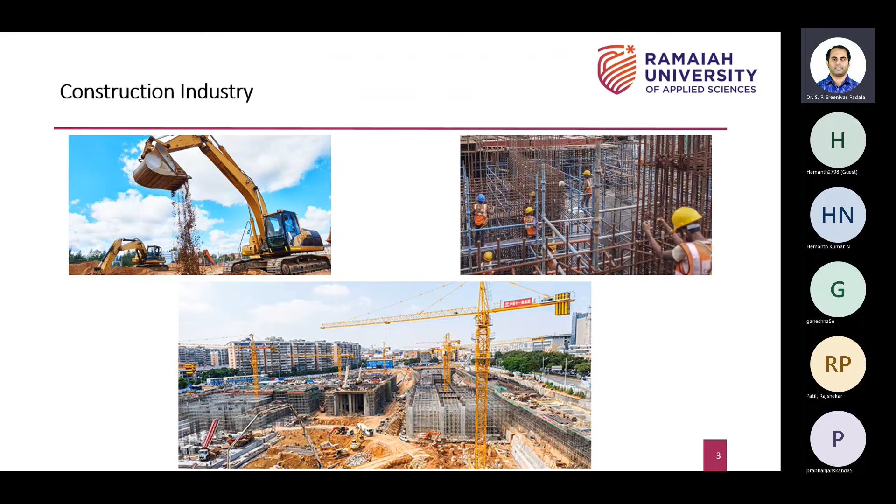Due to COVID, progress was a little decreased. Every company or every industry got affected with COVID. Otherwise, in 2019 only, our Indian government predicted that the size of the construction industry is expected to be USD 1 trillion by 2030. Also, construction is poised to become the largest employer by 2024. To reach that target, we required around 4 million construction engineers on an average over the next decade. That's taken from one of the news channels, India Today, in 2019.

But due to COVID, it got shifted slightly to 2025. What I can say is there is a lot of growth, a lot of requirement in terms of jobs in the construction industry. But again, when I talk about construction industry, I'm not talking about the site jobs, I'm not talking about where you have to work on sites. I'm talking about white collar jobs.

There are also other startups, other companies, other consultants. They found out a lot of other different industry trends. They listed out the top 10 construction industry trends and innovations for the present year - the article was prepared long back, I think they published it in 2019. So they listed out various trends.

Starting with building information modeling, which is one of the future trends in construction industry, and which I'm going to discuss in this webinar. Then we have construction robotics - it's nothing but automation of the industry, using automated machines without help of any manpower. Then we have construction project management - we have MTech in construction project management, a separate course which involves application of various management principles in construction.

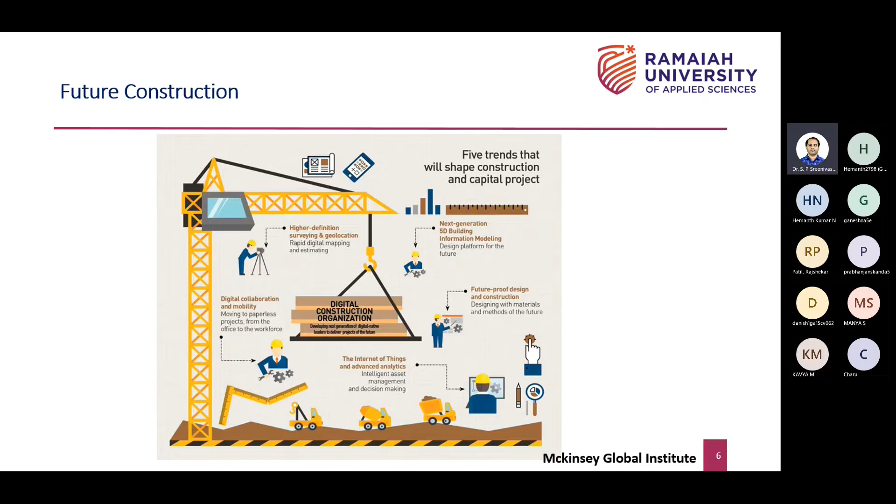It started only 2 years ago, but by another 3-4 years, by the time you graduate - especially class 12 students who want to pursue BTech in civil engineering, or even for MTech, if a BTech graduate wants to pursue MTech in construction management in the upcoming academic year - by the time you graduate, you will find this complete transformation across organizations. You will be getting opportunities in this sector like anything - there is very high demand in our industry.

So again, this is another consulting firm - World Economic Forum and Boston Consulting Group. They also created top 10 trends, similar to the previous slide, but I want to prove that a lot of companies have already started implementing this technology. So from this slide also, you can understand that I'm talking about the application of technologies.

When I say technology, we generally think about computer science, artificial intelligence, machine learning, and some other branches. But what I'm trying to say is there is a lot of requirement to apply the same technology even in the construction industry.

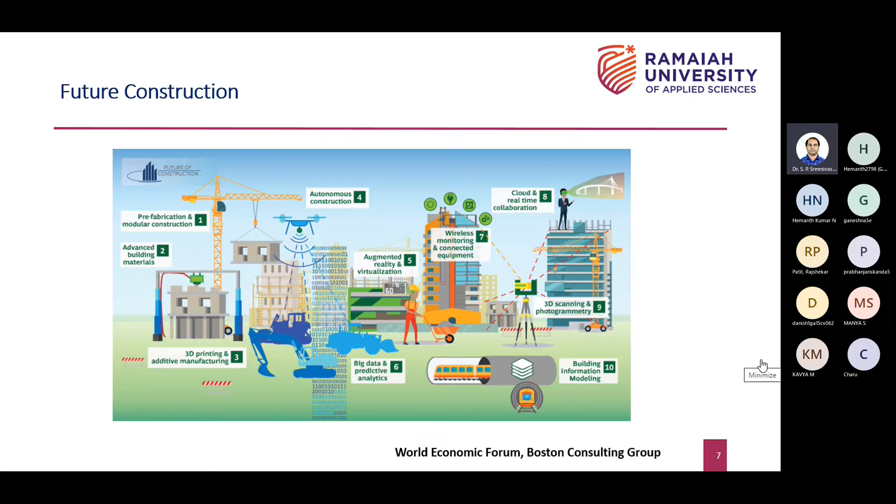As a civil engineer, if you can learn these technologies, you will be better able to apply these techniques in the construction industry, because you will understand what construction is. As civil engineers, you will know better how to apply it than if I give the same job to a CSE or artificial intelligence or data science engineer - they cannot apply it as well.

So there are a lot of new future job skills created by McKinsey. You can see on the right hand side, starting with digital collaboration, then back office work - meaning you're not on site working in the project directly, but working in the office, more like white collar jobs. Then on-site execution, where you are exactly working at the site.

There are around 37 job skills required by industries, predicted and listed by industry. So what industry is trying to say is that students should be aware of all these skills during their BTech and also at the MTech level. You cannot master every skill, but you can see here on the left hand side.

If I talk about 15, see the size of this circle - 15 is nothing but building information modeling. It clearly shows that it's one of the major job fields, or a top skill where you need to build up expertise. And there are many other things.

Number 20 is document management, which involves managing various documents using technology - like tabs or smartphones - to manage documents in a better way. Basically, it's all about paperless work. So you can see many things are there.

Interestingly, you can also see many things - for example, 16 is contract management, then you have 3D printing, then artificial intelligence and machine learning. So there are many job skills in the construction industry which are yet to take place.

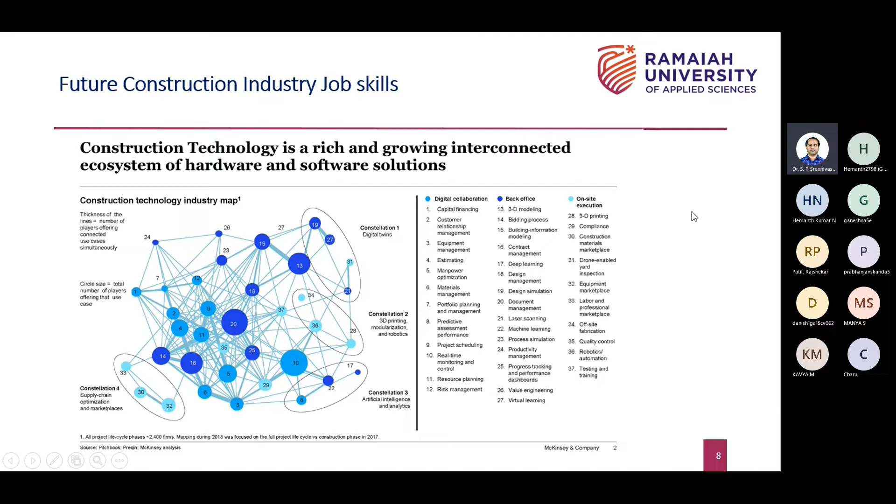In this presentation, I will discuss virtual construction. If you remember the title, it's building information modeling, in short form called BIM. Again, it's a virtual construction intelligence system. So I will be discussing the virtual construction world basically.

The question arises, who will do this job? Obviously the undergraduates, then all the postgraduates, the students have to do this job. That's what this civil engineering is all about. It's completely different now, so I will be discussing exactly what this means.

What is the meaning of this? What is a virtual construction? I will discuss all those things. Now, what is the benefit of going with this field and why is it important? That also I will discuss.

When you talk about virtual construction, it's all about doing all the practices using some technology. What you're seeing in this slide is basically a construction site. If you remember the first slide, I showed you the real picture where you have labor, a lot of workforce, equipment, and a lot of material lying on the ground. It's the same picture, but now you can see technology everywhere, for example site sensors.

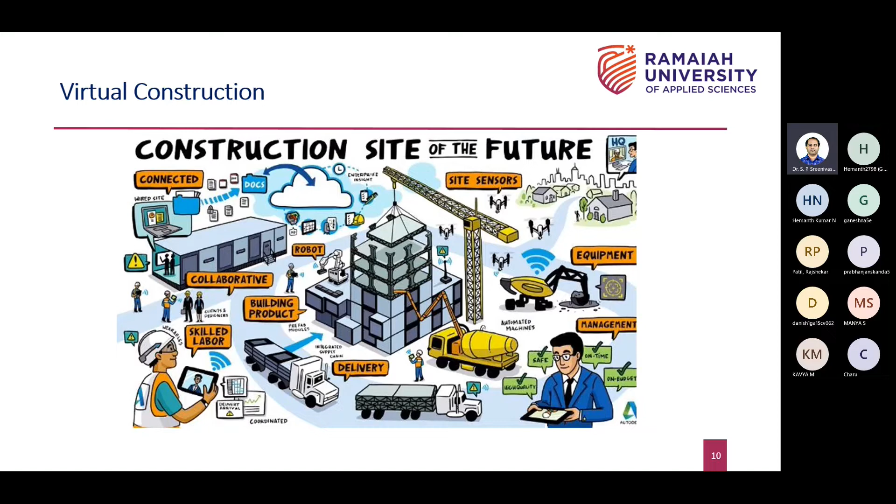So there are many other benefits out there. Now you can see in this slide presently - what you're seeing is all these buildings which are already executed, already built. The building is already completed. But suddenly I want to bring one highway here, I want to start a metro project.

I want to bring something here, some type of transport system. It can be highway, metro, underground, anything. So directly I cannot go to the site and start the work, but I want to check the feasibility. To do that, I can use a technology called virtual construction.

You can see that virtually I am able to build this. It's a virtual model, not a real model, but I'm trying to place the virtual model in this and checking whether it is feasible or not.

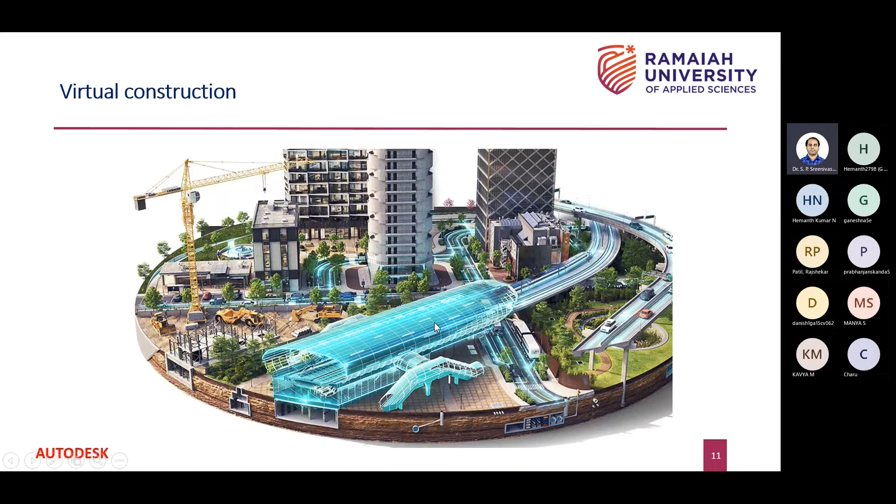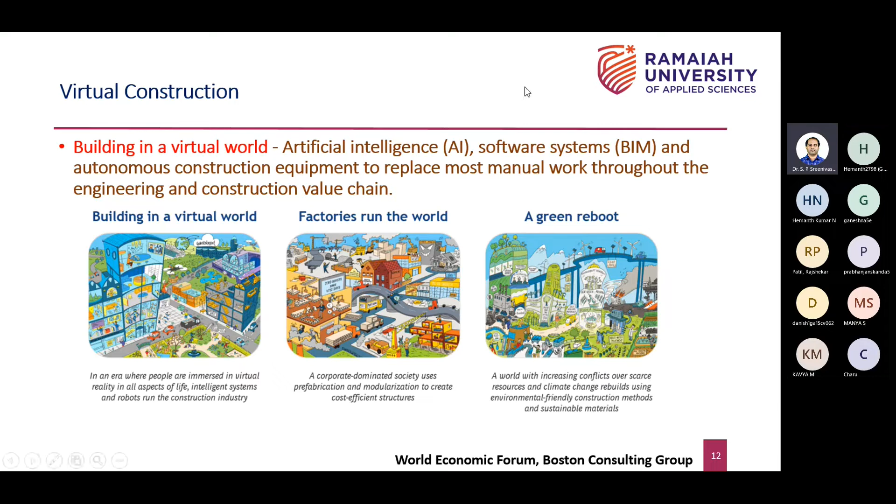When it comes to the virtual model, there are many things, not only building information modeling. It's not only about software - you can see here the application of artificial intelligence, then some software systems like BIM, and also autonomous construction equipment like automated equipment that can help replace most of the manual work. That's all about virtual construction or virtual world. But in this presentation, I'm talking about only the BIM part, not the other areas.

So all this is done before you start the project. It is not done after completing a project or during the project, but everything is done before you plan to do the real work on this site, on the field.

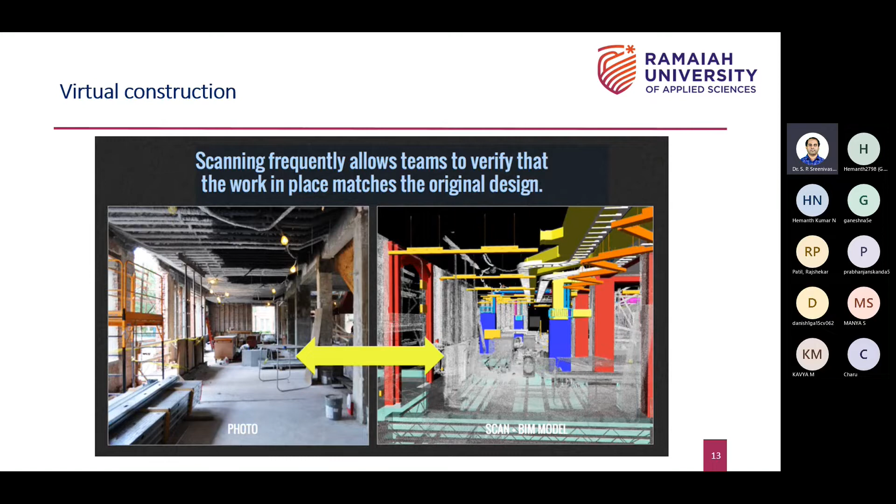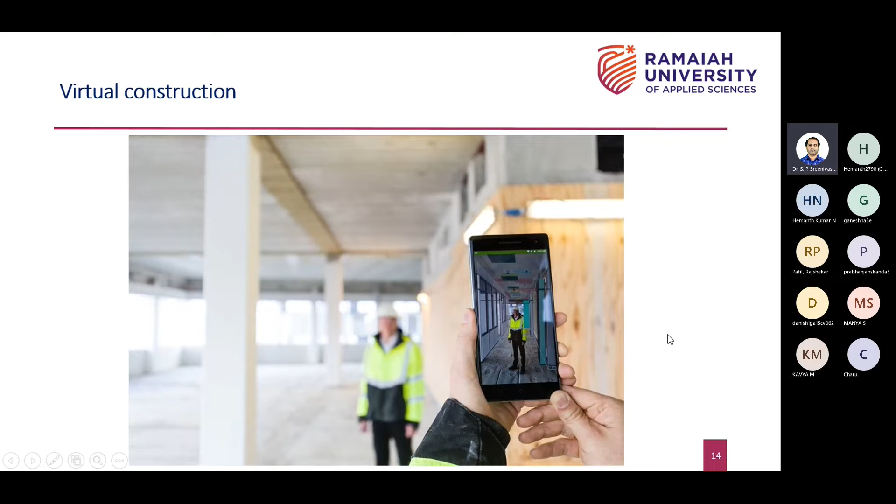Another snapshot here. You can see on the left hand side there is a person standing in the empty layout, just having a structure with the columns, beams and slabs. On the right hand side there is a smartphone, and he's taking a snapshot of the person. In this picture, basically you will see that everything is already completed - there's a virtual model built in the smartphone, and you can see the person is standing in that virtual model. So this also will help us understand how it will look in the future before you start working on that. That's the purpose of virtual construction.

This is another field. You can see the person is standing right now. He's holding a tab and there is no structure in front of him, but he already built the structure virtually, and he's just come to the field to check how it will look like. I mean, when I say how it will look like, it's not in layman language - it's technical, but I won't use too many technical words.

You can do many things. You can do some analysis - loading and structural analysis, cross checks, safety analysis. You can also do some costing, some simulations, and many other analyses like energy analysis. So we can do many things in the virtual world.

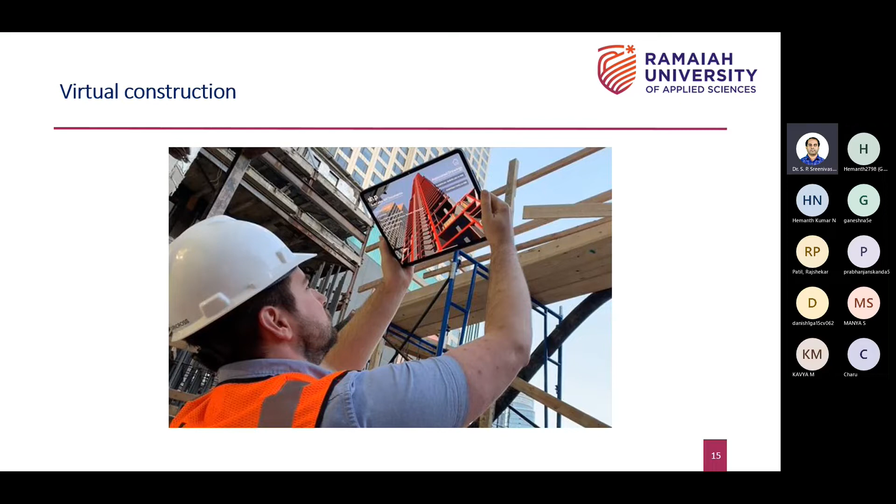But as of now, what you can see is a person holding a virtual model of what's going to happen in future, and he's just checking how it will look like. So what I'll do is play one small few-seconds video.

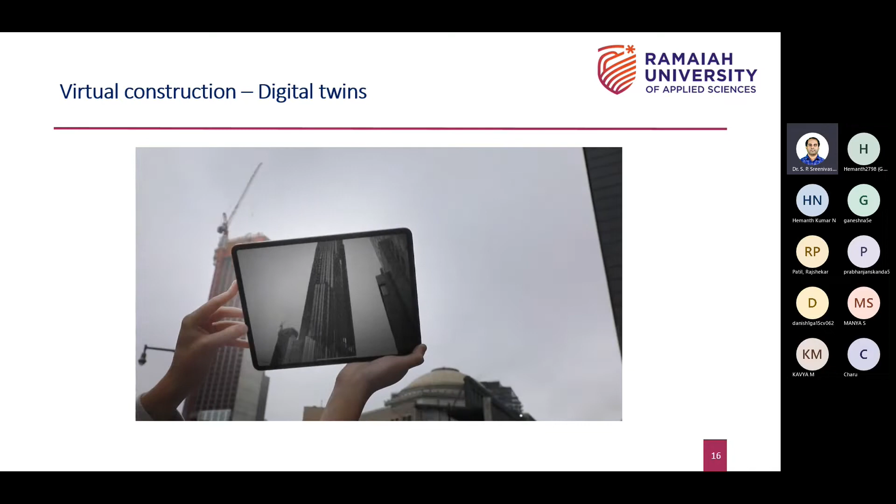You can see here also the person is standing in the city, in the busy city area. In front of the tab, the contractor wants to build a very tall building, and it's already built virtually. So before they start the project, they want to check how it will look like. So you can see this snapshot. Let's see a few seconds video. So it's very clear that tall building is not there, but it's already built virtually, and they're trying to locate there, trying to understand or check the feasibility.

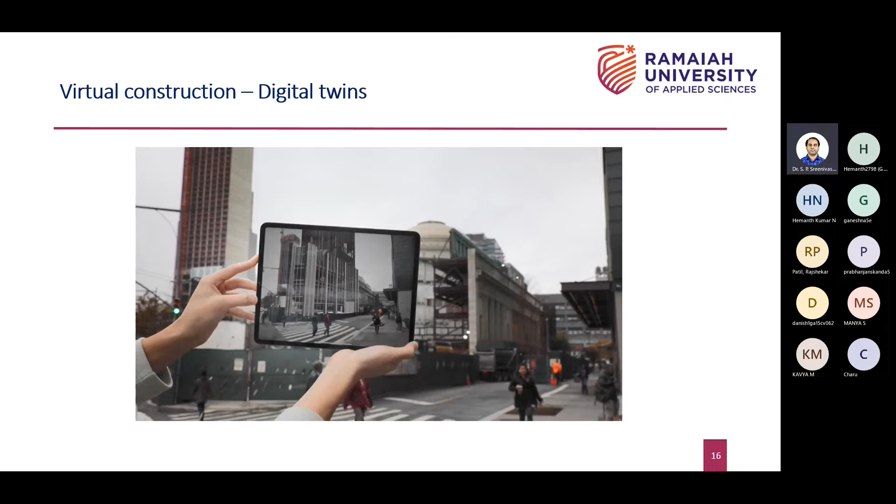And you can see that people are moving here, and it's not affecting that model. I mean, see the quality, the level of detail required for that. It's all about virtual construction.

So again, there are a lot of different names given for virtual construction. Some say digital twins, some talk about augmented reality, then virtual reality. We also know there are separate courses, online or degree courses, for augmented reality and virtual reality. Construction people say it's BIM. In UK, some countries call it zero drawing construction - meaning you're building a building without any documents, without any drawings, without any detailing, just simple with 3D models.

You can straight away start a project without any paperwork, or paperless work. Then some other group of people say it is nothing but digital construction - application of digital technologies. Then construction industry 4.0 is another term used. So there are different terms used to define virtual construction, but in this presentation, I will be using BIM as a term to explain virtual construction.

In the news, when it comes to India, not only other countries, you can see a lot of articles already published by various news agencies, starting with Hindu, then Digital Builder, then Geospatial World. There are different organizations in India. They already have published articles about this topic, and this article says that there is a lot of demand for application of these virtual technologies.

So what it says again is it's for students. Students have to develop these skills. You cannot learn everything in your BTech or MTech level, but you should be aware of all those things so that you will be ready for the future jobs.

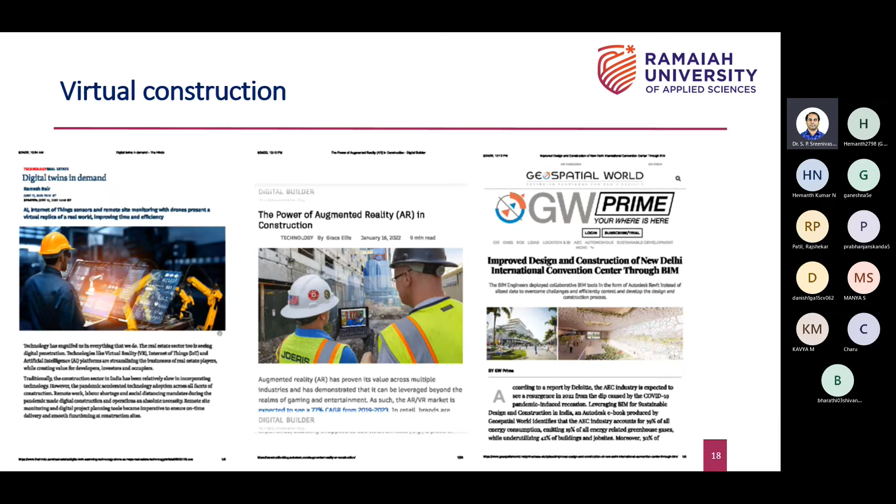So as the title says in this webinar, it's building information modeling. In short, I call it BIM. It's one of the best platforms where you can build various visual models.

So what you can see in this figure is the life cycle of a project. Generally, initially you have to start programming, meaning you need to schedule it, plan for the project, identify the various activities involved, set up and design the project, estimate the resources, calculate the cost of the project. You need to do a lot of planning.

Once that is done, you have to develop a concept drawing, a concept model, then go with a very detailed model. Then you will be doing a lot of analysis, like structural analysis, energy analysis, scheduling, costing. Then documentation is very important for various reasons, to communicate with other people and even for getting approval from various agencies. You need to document everything.

Once it is approved, you will start fabricating, then start construction, then start applying or procuring the equipment. Once you complete a project, you have to maintain the building. If you talk about apartments, there will be operation engineers and operation staff who will operate the building and take care of maintenance. Once the building becomes old, finally either you can demolish it or renovate it, which is called renovation. So that's a very standard project life cycle.

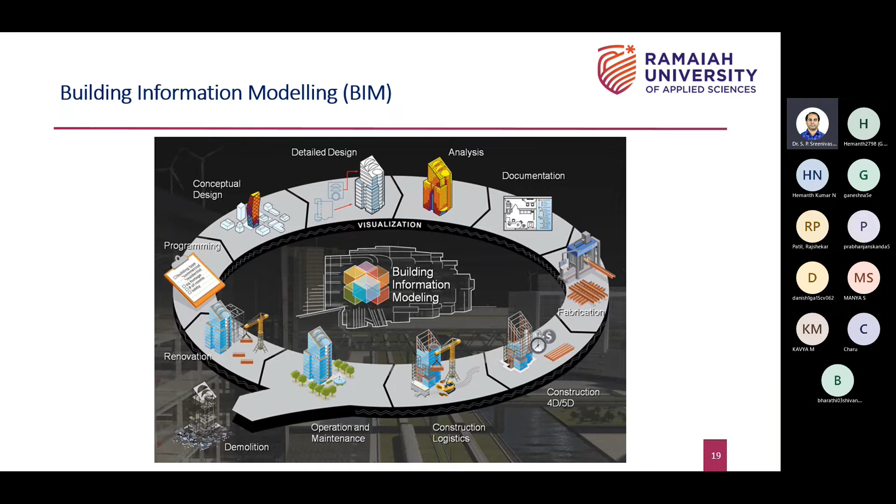What I can see nowadays is that students, especially those in class 12, or even their parents, are not aware of this technology which can be useful in the construction industry. Everyone thinks construction is more like a blue collar job, working in the field. It's not like that. We have a lot of white collar jobs where we need to apply a lot of technology to improve the performance of the projects.

So why is this industry, the Indian or in general the construction industry, interested in BIM for virtual construction? What is the main reason for going with this technology? Why BIM? Why virtual construction?

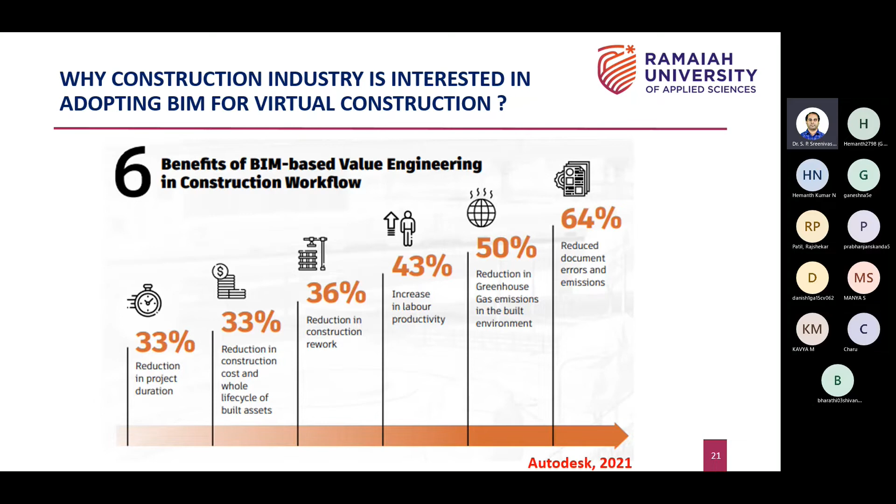A plant room has a set of equipment, pipelines and so on to provide a cool environment in the structure. It's basically a heating, ventilation and air conditioning system, among other systems that help operate the building, regulating the temperature. If you want it warm or cool, it helps provide that.

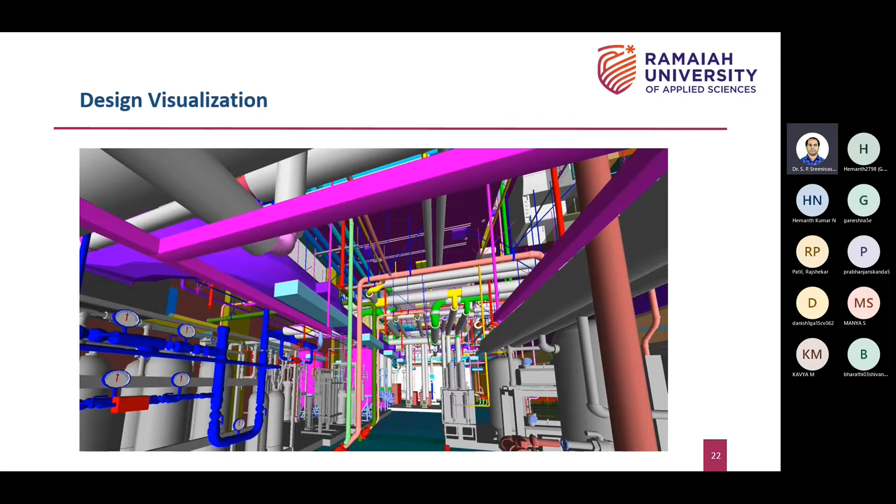But for that you need to install many things. The project hasn't started, but I've built everything virtually, so now I can walk through this model. I can check whether everything is correctly and properly installed, and whether any pipeline is hitting other pipelines. So those things can also be visualized.

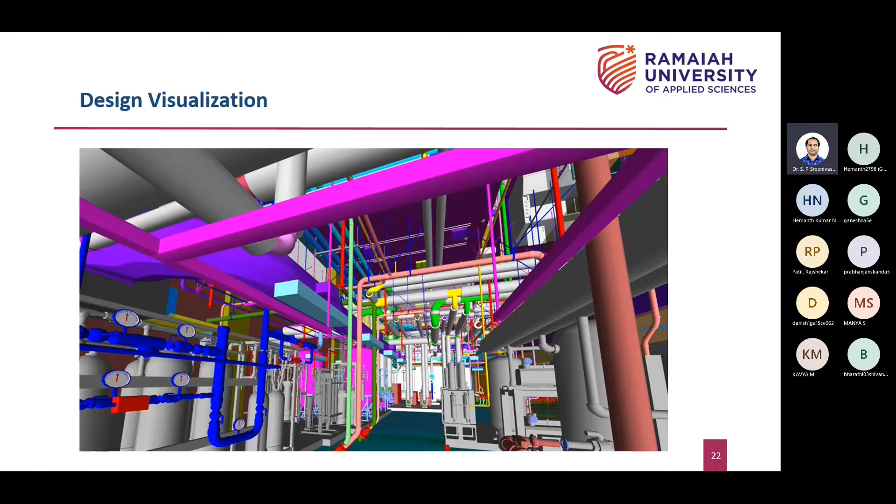If I find any issues, I can resolve them now in the digital model. Then in the real project, I won't have that type of errors. So that is an example.

For example, you can see here there's one column, a vertical structure, and a horizontal structure. The vertical part is an I-section steel channel, and horizontally there's a beam coming in. This red colored beam or structure - these two structures are getting collided virtually.

Here you can see the pipeline going inside this beam, and on the right hand side this pipeline is touching the beam too. If you don't identify these mistakes before starting the project, you will end up doing a lot of rework in the real project.

Just imagine if you find these mistakes in real projects - what happens? You have to stop the work, remove things, keep all the manpower idle, and you lose a lot of money. If you delay your project by even 1 day, you lose more money - you can lose up to 30 to 40 lakhs per day if you're delaying the project.

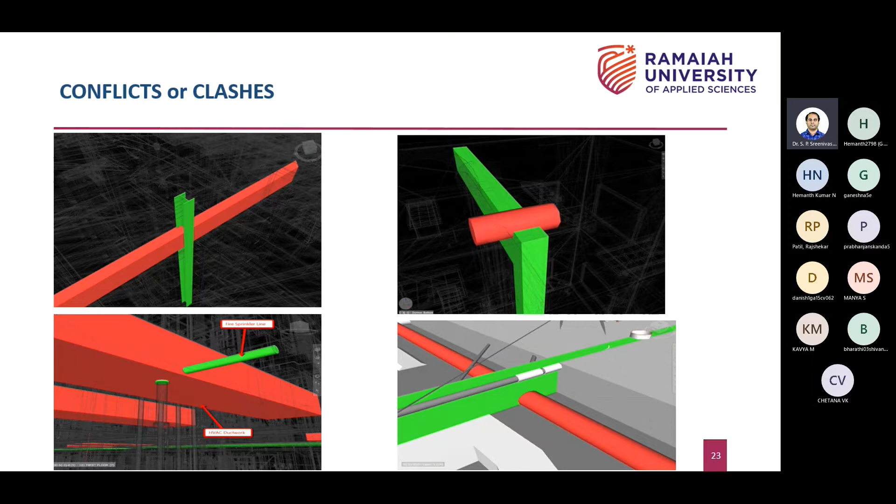So you can avoid all those errors if you apply this BIM technology. There are more examples I'm showing - you can see on the left hand side there are pipelines hitting each other.

There are pipelines, channels, cable trays. If you see any commercial building like hospitals, metro projects, shopping malls and all, you will find a lot of pipelines, cable trays, electrical pipelines, electrical conduits, electrical wirings, plumbing pipelines, fire pipelines. So many things will be actually installed at the ceiling level. If you don't install properly, they will collide with each other and it will affect the performance of the building. It will also increase the cost.

So using this, if you are building all this virtually before you start the project, you can identify these errors. That's what BIM is all about. It will help us identify major errors in the project.

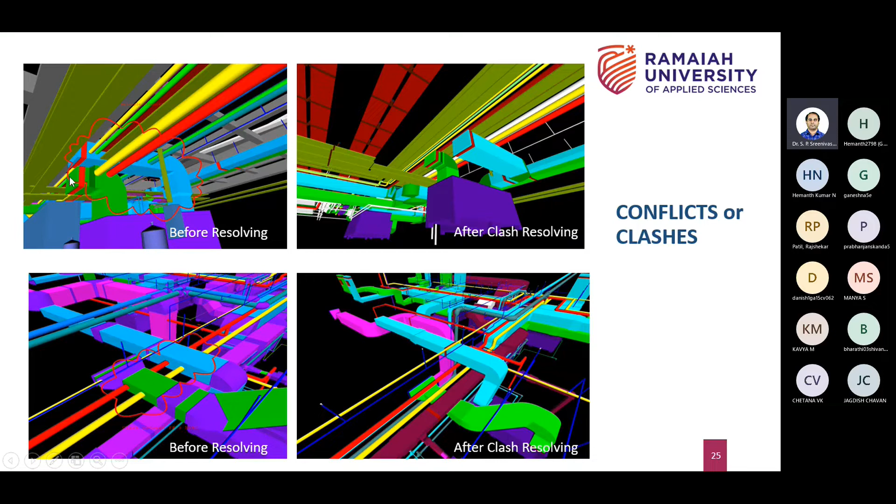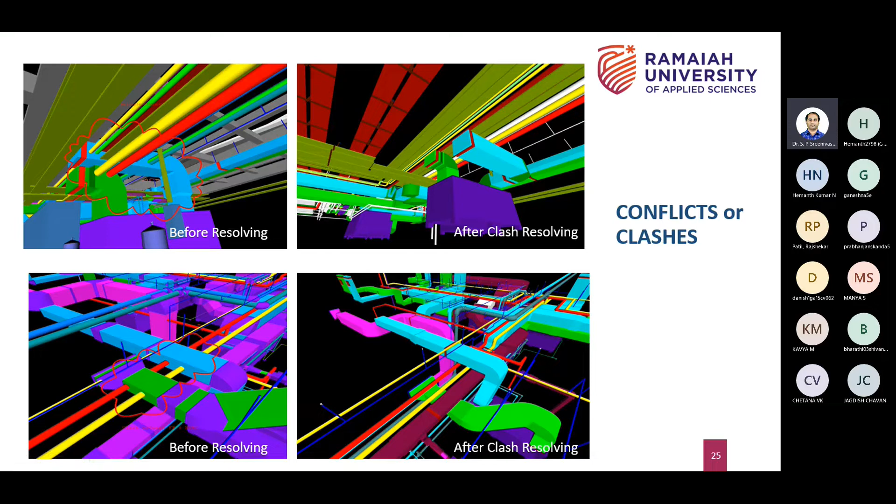You can see on the left hand side before resolving. Once you build it digitally, you come to know that these pipelines are hitting these HVAC ducts, basically called air ducts. On the right hand side now it is not happening. Everything is free. There is no clash, there is no conflict. So you can avoid these things, you can resolve all these things, then you start the project. Then you will not have any problem when you are actually starting the project. So all this can be done virtually before you start the project.

When it comes to BIM, there are various dimensions, but at entry level we should know about three dimensions, starting with 3D. On the left hand side, what you see is nothing but the 3D model. I think everyone knows what a 3D model is and how it's done. The 3D model helps us, it gives more clarity as compared to the 2D model.

Then the second dimension is nothing but the 4D model. 4D model is all about time, like time simulation. It helps us identify and determine the timeline, determine the duration of the project, like how much time I have to take to start a project, to complete a project. What is the timeline, how it looks, how it works.

For example, you can see the equipment standing - there's a tower crane installed in the building, and you want to know how it will rotate, how it will affect the building. If I rotate on the left hand side, whether it will hit something. If I rotate on the right hand side, whether it will hit something. So you can simulate everything. That's called 4D - basically it's just a timeline, a time dimension.

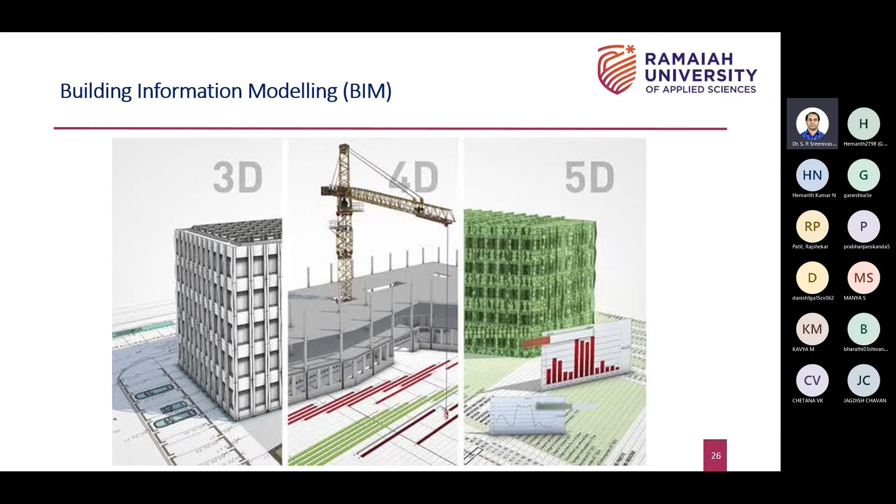And 5D is all about costing. You can actually calculate all the cost required to complete a project. But all these things happen virtually again, with the help of a 3D model. So 4D and 5D are derived from the 3D model. The 3D model is very basic - that's the basic requirement. You have to build the 3D model, then only you can go to the other dimensions.

There are a huge number of companies in India supplying a lot of software to build these virtual models, starting with Autodesk, then Bentley, then Synchro. There are other softwares too, like Dropbox, MS Excel, Microsoft Project, Google Drive - these help with document management. Then for cost management there are a set of softwares, and for construction management again a set of software. So there are n number of softwares already in the market.

Even construction companies and technology providers are aware of the benefits of this. The gap is that students and engineers are not available to do this work. That's the gap right now which we need to fill within another 2-3 years. You'll be learning many things in BTech, and again in MTech you can pursue and learn many such softwares and apply them, even in project works you can start applying this concept. So this is all about introduction to BIM, which is one of the virtual construction platforms that helps us manage the project in an intelligent manner.

For the remaining slides, I will just show some projects, some snapshots. I will not discuss too much technical detail because the purpose of this webinar is to create some awareness.

It's not a technical webinar where I have to discuss things in too much depth, because the purpose of this webinar is mainly for class 12 students or BTech undergraduates who want to pursue MTech. I don't want to go into too much technical detail because you won't follow unless you join here and start learning in the course.

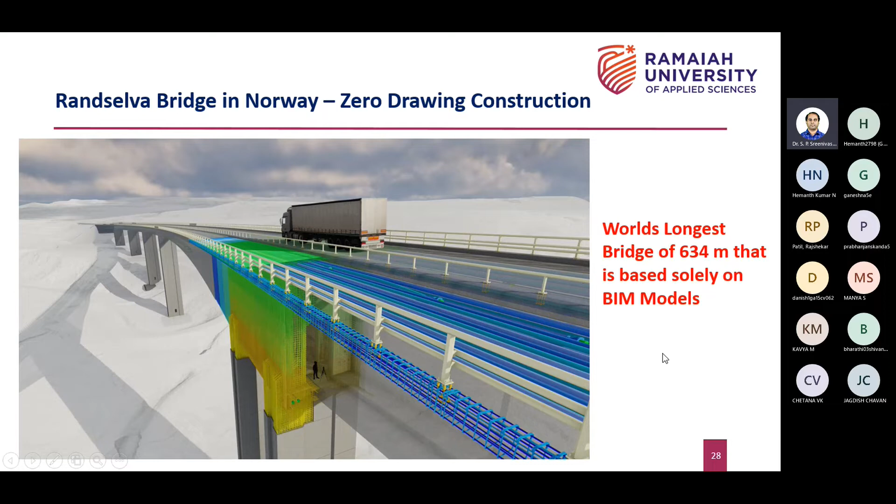So they completely use BIM and build the entire bridge virtually. You can go inside the bridge, you can do the walkthrough like I told you. You can see the bridge from the outside, and you can also go inside the building and check all the details.

So all this is done before you start the project. So if you want to change anything, you can change it easily right now. That's the purpose of this virtual construction. So you can do your project better, you can plan your project better.

You can monitor your project better, and finally you can save a lot of cost and money in the end. But the current status of this bridge, this is actually taken I think six months back. If you see the current status of this bridge project, it's just started, maybe not even six months old.

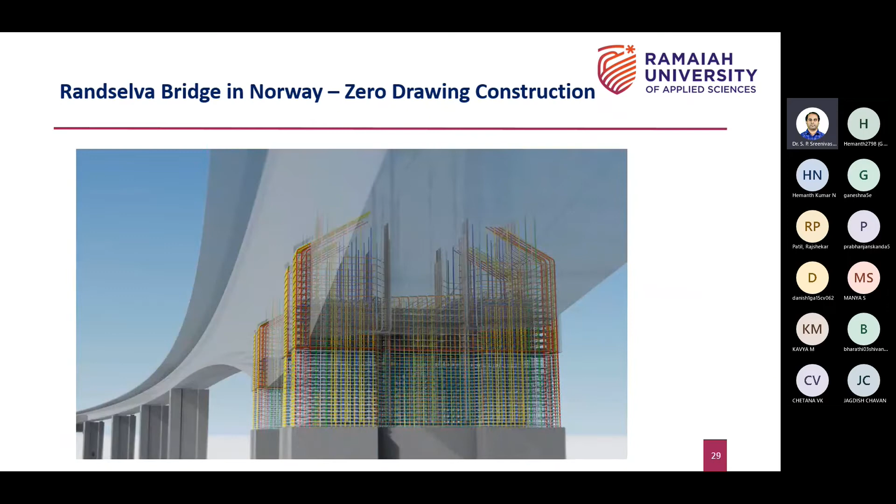They have to work on a daily basis, they have to complete the project within a given time. They're planning to wind up this project within 1.5 years. But what you saw in the previous slide, it's already built virtually. Now they are building it actually, so they know everything about the project virtually before they even start the project.

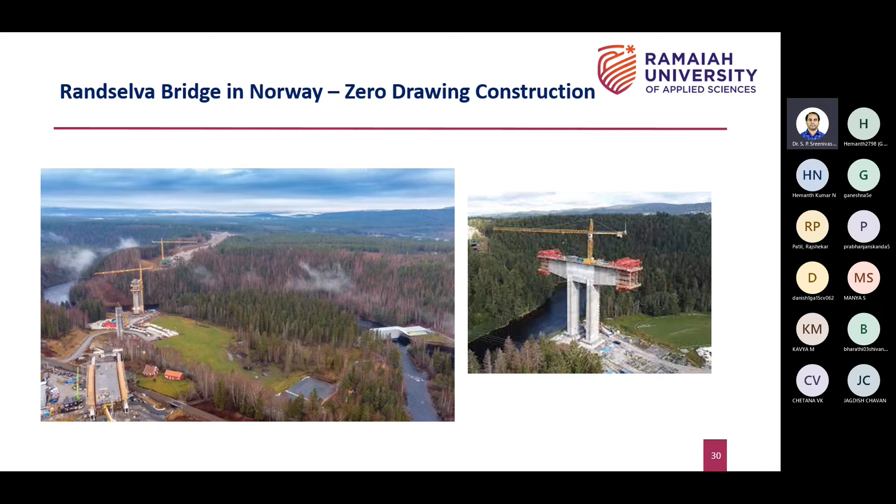What happens finally is it gives better quality, you can complete your project without any errors or issues. When it comes to India, it's already being applied, various companies already started applying BIM in India, starting with Personal Rapid Transport System in Amritsar, Bengaluru International Airport, Nagpur Metro Rail Corporation project, DMRC Delhi Metro project, and now the Agra and Kanpur Metro project recently started also utilizing BIM.

BIM is not only used for constructing new buildings, it is also used for renovation works. You can see Central India's Gwalior railway station is also renovated using BIM. And when it comes to buildings, generally people started applying BIM in buildings.

In hospitals, shopping malls, offices throughout India, there are a lot of projects. More than 50 projects have already applied BIM. I don't have all the details because it's confidential. Companies don't share the details, but I have a few snapshots.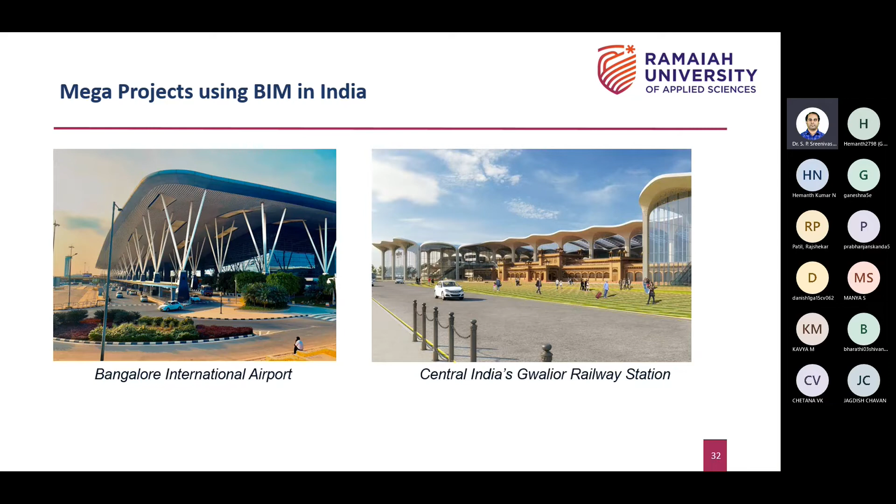On the left hand side is Bangalore International Airport, again it's a virtual model. On the right hand side is a renovated railway station at Gwalior. These pictures are not static, they are simulated. We don't have video here, but you can simulate it, go inside the model, and virtually visualize everything.

On the left hand side is Nagpur Metro Station. On the right hand side we have a therapy center in a hospital. You can see the level of detailing they did virtually. It takes a lot of time. It's not easy, it's a very tough job. It's a white collar job, a Monday to Friday job, you get paid high, everything is fine, but it takes a lot of time and requires a lot of knowledge of technology to apply this.

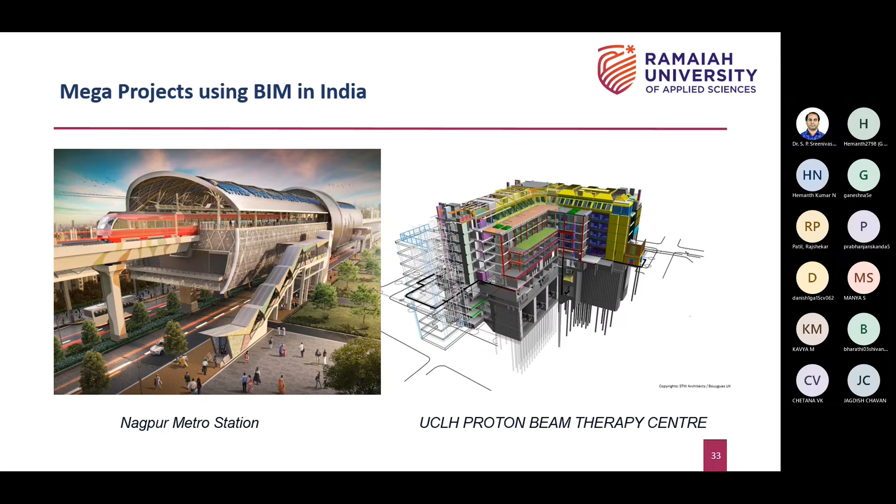Now I will show some project work, BIM projects executed by students in our university. I'll show snapshots of each project, done by BTech undergraduate students and also PG students on our campus. From the last 2 years we started working on these projects. The students who applied BIM in their project work also got jobs. There is one person called Kishore who used BIM, I will show that.

This is one of the projects they did in BTech 6th semester, where we have a mini project. His name is Kishore. He actually built this 3D model, and he did many other things which I will show later. He got a job in Atkins, one of the top consultancy firms in India, as a BIM engineer. He never imagined or dreamed that. I told him that if you start applying this technology at the BTech level, you can secure a job later, and it finally happened.

He is currently working as a BIM trainee. Within another 6 months he will become a BIM engineer. So this is one of the projects, what you can see in this snapshot is basically a 3D model of apartments, built using the software called Autodesk Revit 2020.

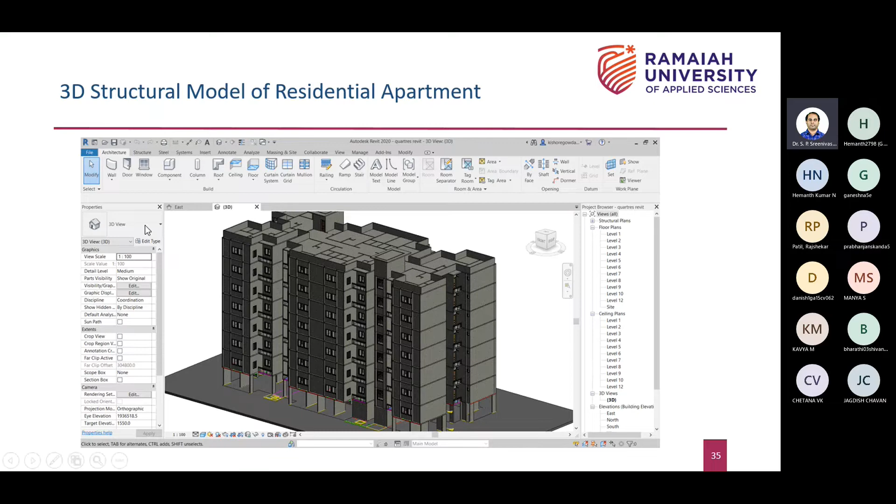This is another project done by other group of students in BTech. They built a shopping mall. This is purely architectural work, not construction work, it's purely architectural design. You can see the level of detailing here, it looks very nice, but it is mainly for marketing purposes and it will be useful.

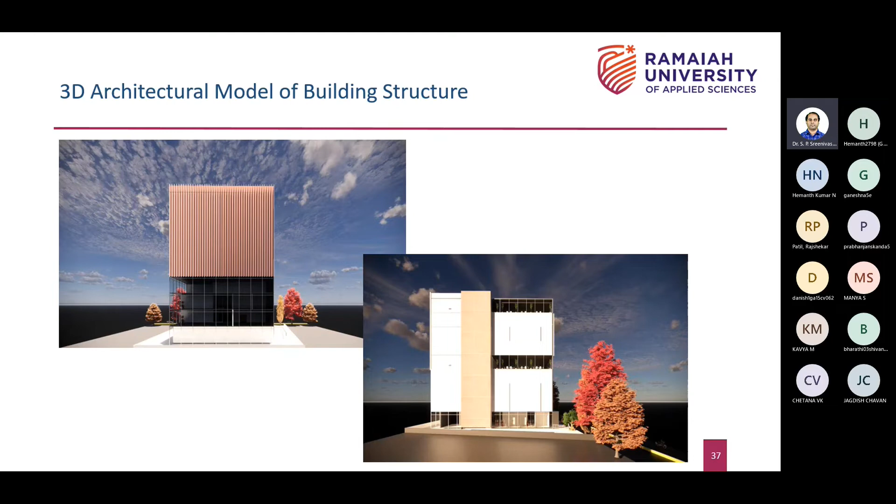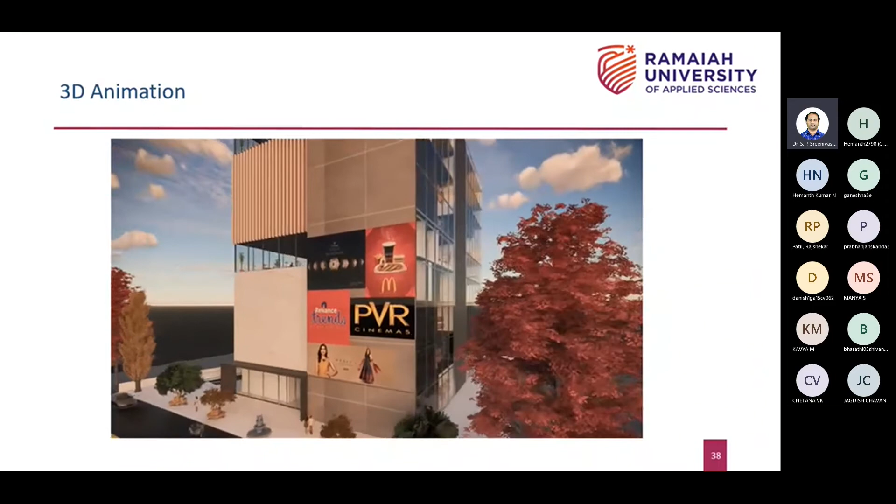You can see there is a small animation here. It's very helpful for real estate projects. Especially in Bengaluru, you have companies like Sobha, Real Estate Brigade, Prestige. In Delhi you have many other companies. Every state has very different types of real estate companies, so they can use these types of animations for publicity. This is another project model.

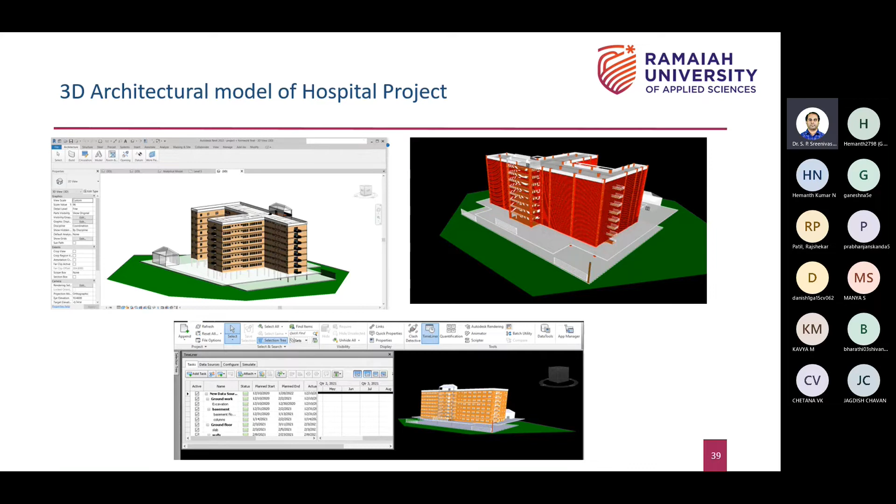It's a hospital project done by an MTech student. This is a real project, executed in Andhra Pradesh, and it is already completed. He went to that project site and sat there for 3-4 months, building this entire virtual model to compare it. If you use BIM, what benefits you get, and if you don't use BIM, what benefits you miss. He compared the project with 2D and 3D, virtual and non-virtual, and found there are a lot of benefits.

Whatever benefits I mentioned at the beginning of the slides, he validated those benefits. Another project was also executed by students at the BTech level, a commercial office building. You can see it's very big in terms of size. In this project, this student took a lot of effort to build the model. You can see it is a structural model, with columns and slabs visible. I'm showing just a snapshot, but there's more to it.

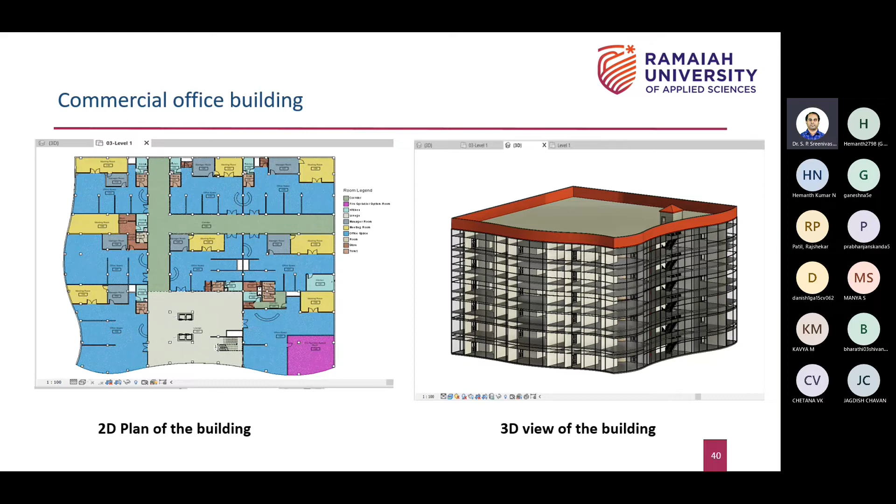You can go into this model, rotate the model, and get any detail you want. So you will get 100% information from these models. But if you go with the 2D plan like what I showed on the left hand side, you cannot get all the details, you will miss a lot of information. It will not give you proper clarity. But with 3D models, virtual models, you will get every detail in that model.

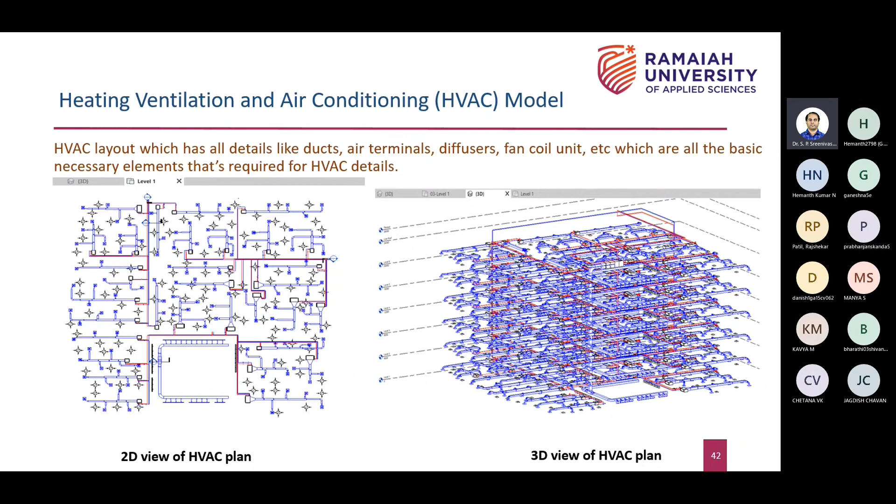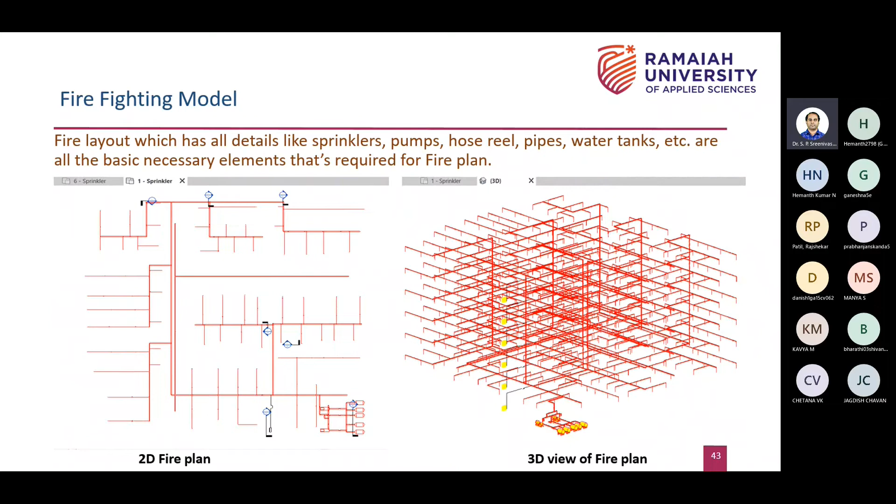It's 3D modeling, what you're seeing on the right hand side. On the left hand side is a 2D model. There's a firefighting model inside the building. Firefighting is mainly for supplying water in the event of fire. So he also modeled firefighting models.

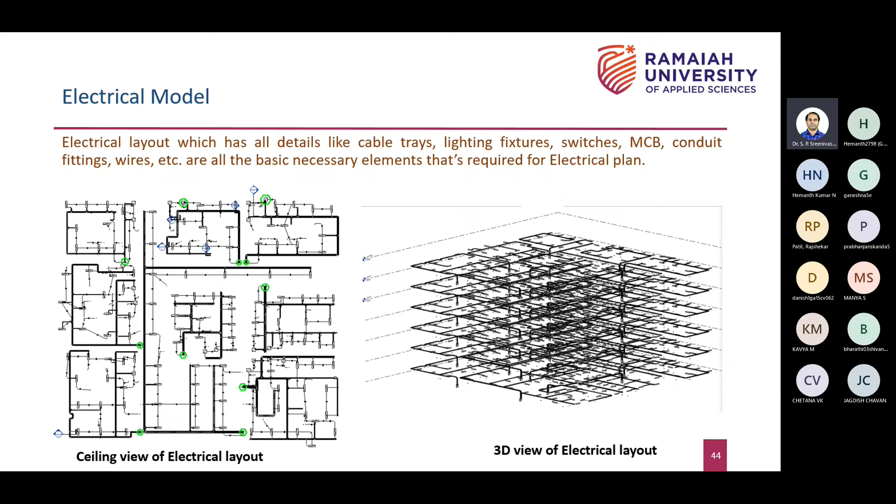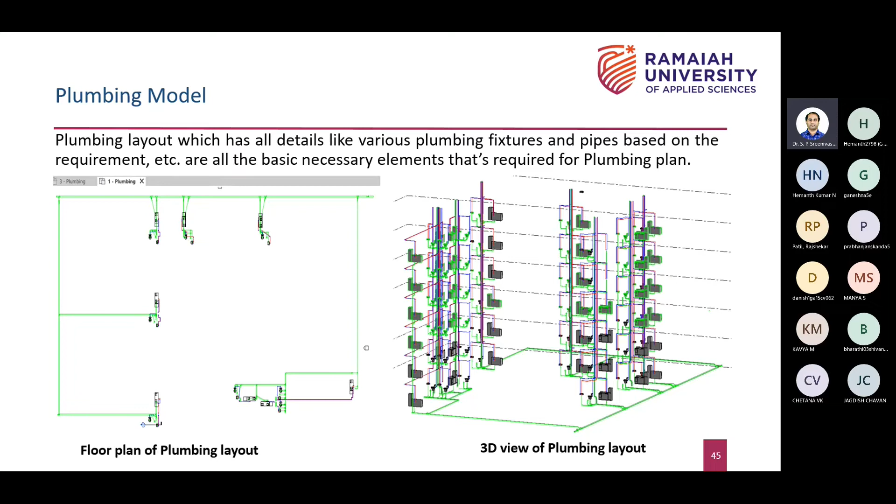And this is the electrical model. Electrical model includes the wires and all, conduits, cables for providing electricity. Even that also he modeled in the same building. So you see how detailed it is done. Virtually everything is built already before you start a project. And this one is a plumbing layout, which involves washrooms and all, pipelines, drainage pipelines, everything.

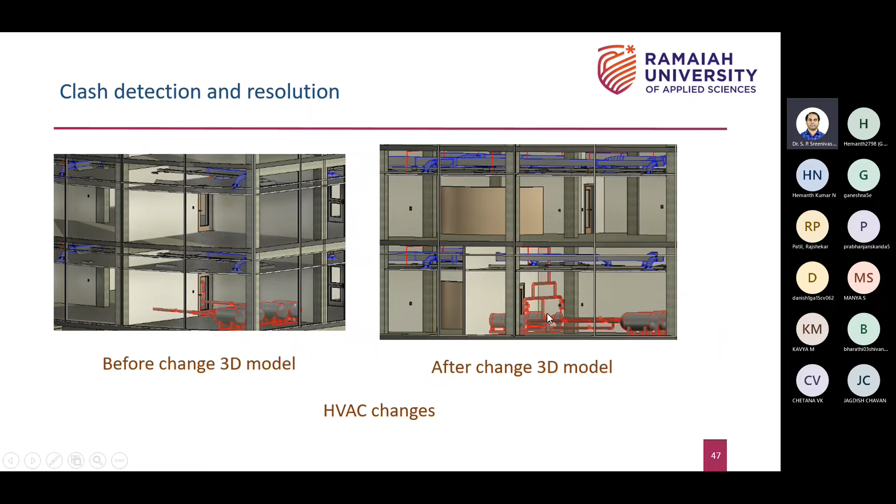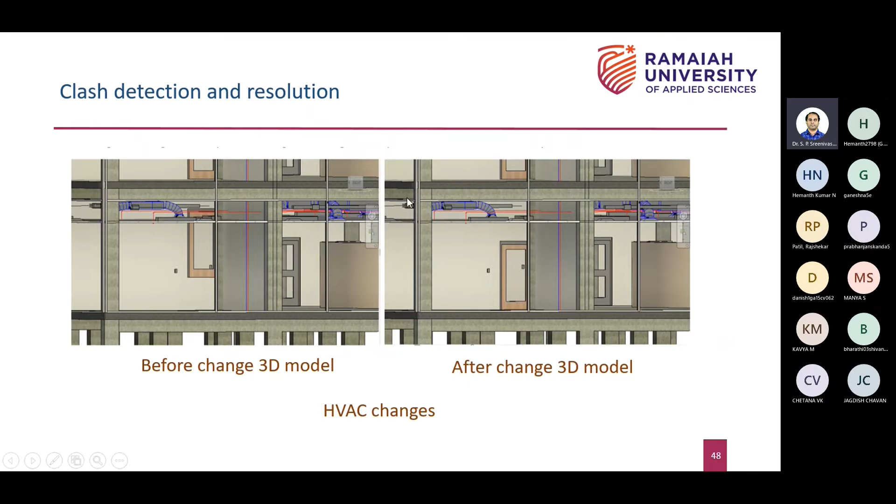This is another interesting model. You can see on the top line there are ducts passing here which are hitting the slab, whereas here the slab is clear - this clashes. You can see on the left hand side there is a wall coming here, but you want to pass a pipeline into this wall, and there is another wall coming here. So what happened on the right hand side - he removed that wall.

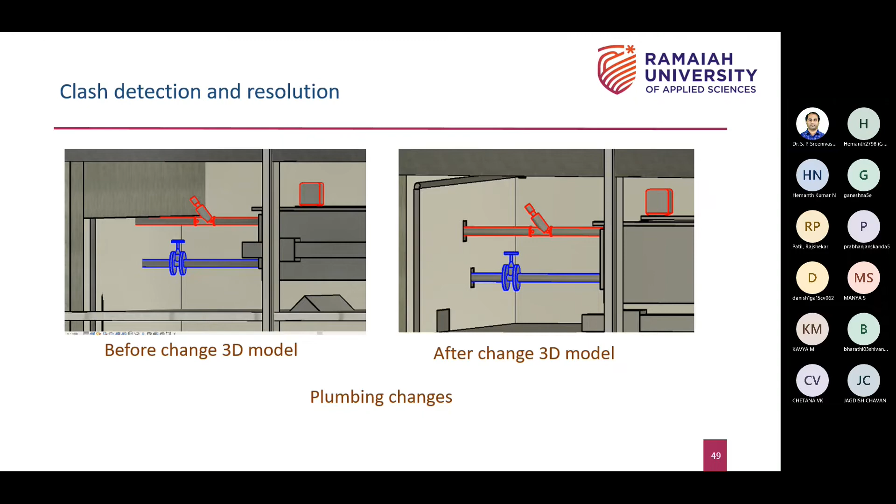So this is what happens if this is all virtually done. There is no loss of money, there is no loss of maybe some time you have to take, but you're not losing any investment. But if the same issue happens in the actual project, then you have to remove that wall, you have to damage that wall, you have to again stop the work, and you will lose a lot of money. If you talk about any project costing more than 200 crores, if you delay your project even by one day, you will lose up to 30 to 40 lakhs per day. So it's not cheap - you can avoid that expense if you are applying BIM or going with virtual construction.

This is another type of snapshot, another type of analysis - again this is nothing but a clash analysis. You can see on the right hand side, left hand side, everywhere. Below, you can see there is a pipeline hitting the door, above the door. So it has to be changed. So what happens is this BIM platform helps us to identify these mistakes.

That's why in the title I have kept the word intelligence. BIM is nothing but a virtual construction intelligence system. It means without our effort - we're not doing this, the software automatically identifies the mistake. It tells us that there is an error here, you have to rectify it. That's why it is called an intelligent model. Again, the term is taken from artificial intelligence.

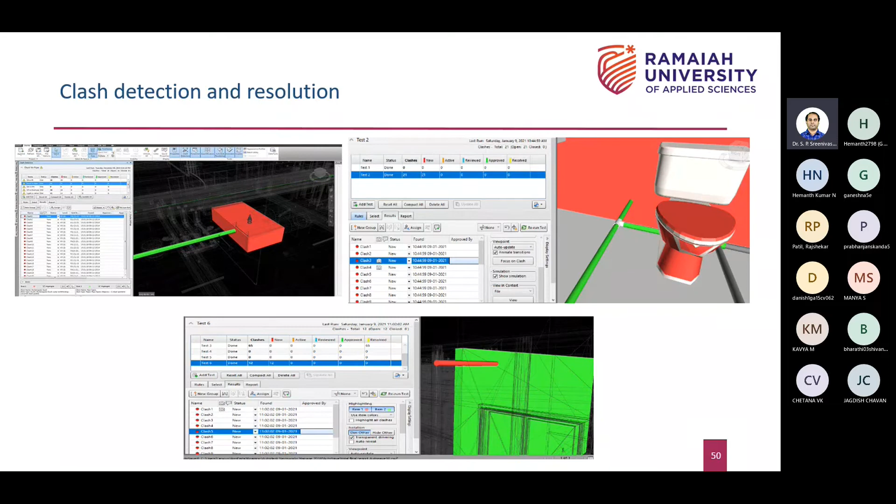So whatever I've shown in these projects, you may be thinking it's all about modeling and all, but I did not show some analysis - there are various types of analysis that can be done. I am showing only one type, which is a 4D simulation, which shows the timeline of a project from start to end - you can see the simulation. So I will just play this small video, which is exported from the software called Navisworks, an Autodesk product.

On the left hand side, you can see data showing for every floor as the building moves up, what is the cost you need to pay, how much time it takes for each floor, how much labor cost and equipment cost I need to spend. Everything is calculated and simulated here.

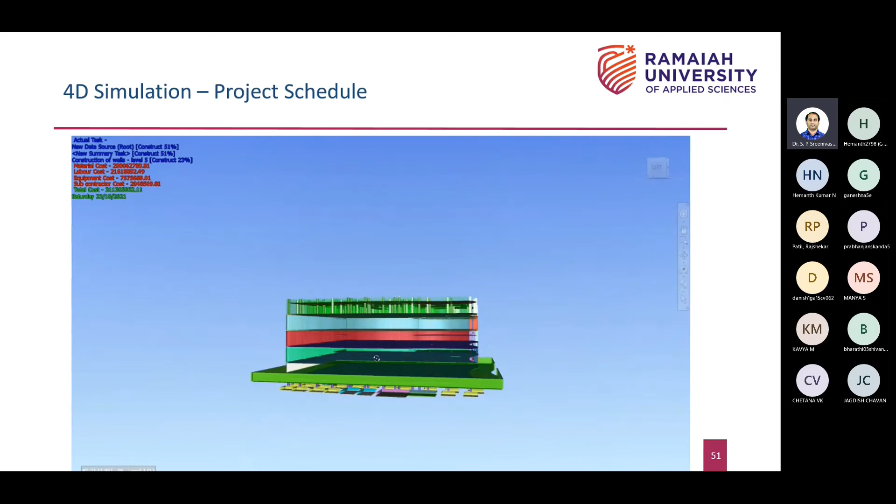What I did before playing this video is move the model. You can see how the model is moving, and wherever you want, you can check it. It's not static, only in dynamic can you visualize the model. You can also go inside the model, but if I do that it's not clear in the video, so I did not do that, but I will show another video.

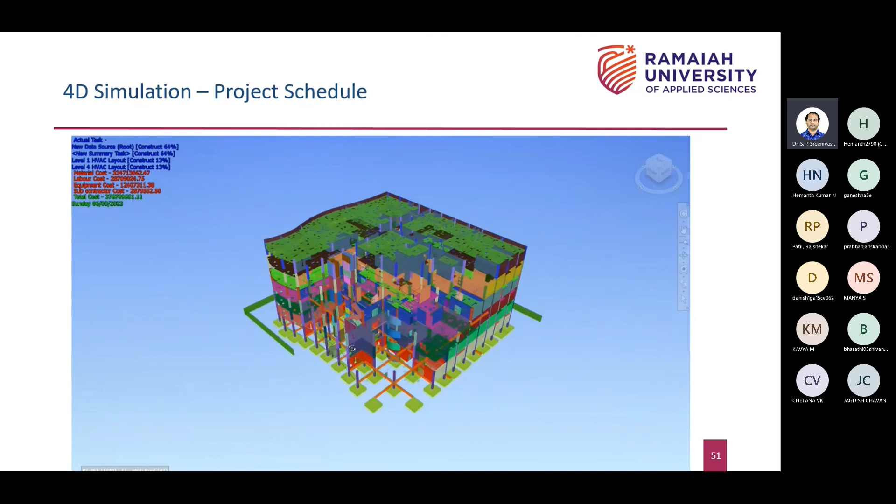So the building is going up, actually building up. On the left hand side you can see the timeline, showing when the project started and when it's going to end. You can see the cost also, and the progress of the work, how much project work is completed. You can stop any time and check whether it is proper or not.

This video can be compared with the actual work. When starting your project, you can check this virtual simulated model against the actual model. You can also rebuild it from the actual conditions, and you can modify it.

So this is a building - what do you see in this? This is the outer part of the building, but you did not see the internal part. Internally, the pipelines I shown earlier - air conditioning pipeline, fire pipeline, plumbing pipeline, a lot of pipelines, electrical lines - all required to be installed in the building. That's also simulated here. So what I've done is hidden these external walls.

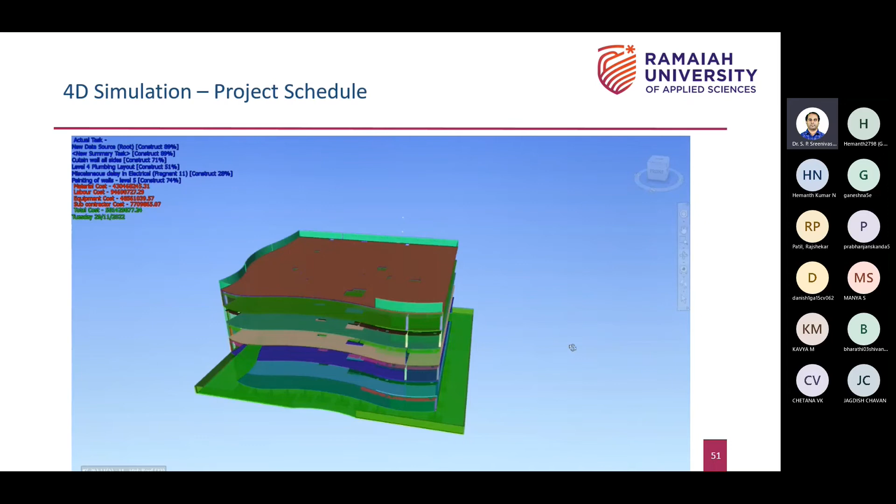Now we'll play the same model video, but I will show the internal part of the building. So it's the same model, but I'm showing the internal part. Internally, you will see how the pipelines are installed.

But it's a 2-year project, so I cannot simulate a 2-year project now - we cannot sit for 2 years. So what I've done is scaled it down to some 30 seconds. You cannot see everything, but what you can see is the inside part of the building, all the pipelines getting installed. This is how the project will be installed in the real project.

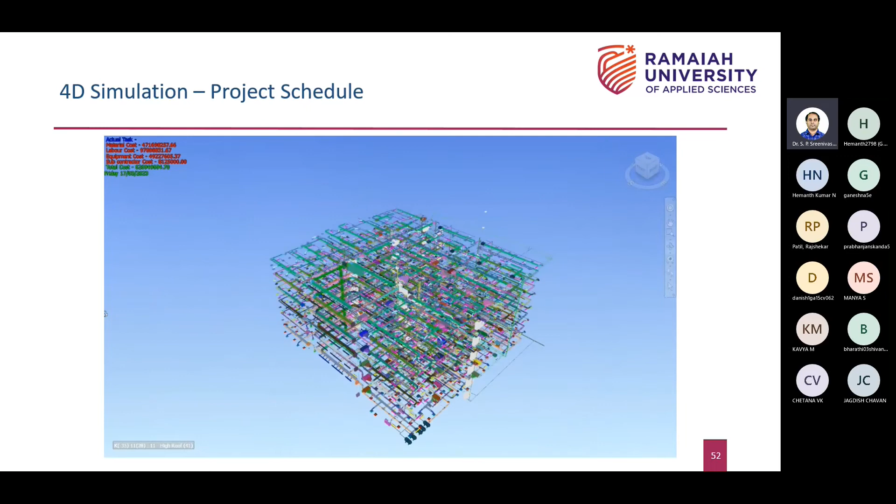So you can identify the mistakes. You can also check how much time it is taking, whether it's less or more time. If it's taking more time, you can come back and change the layout, change the materials, apply even better technology. You can do a lot of things like that - all the trial and error you can do.

You can do a lot of mistakes, no problem, because it is a virtual model, not a real model. So you will not lose money - only you will lose some power in the building. You will be using one high power laptop, requiring electricity, and 2-3 people to work on this. That's all, you will not lose much money.

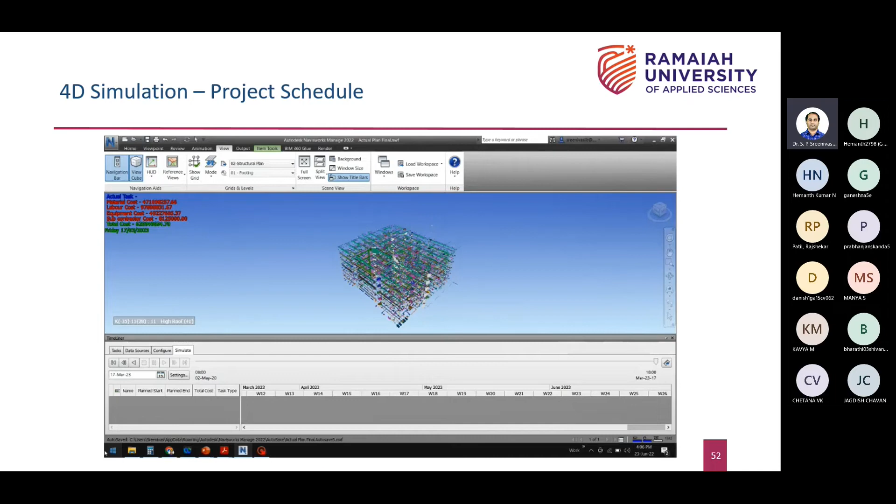But if you identify the mistakes in the real world, you will lose a lot of money. You cannot do any trial and error in the real projects, right? So that's all about virtual construction.

There are sort of softwares used in all these projects, starting with Excel, also one of the software. Then you have Microsoft Project, then Autodesk Revit for 3D modeling, then Autodesk Navisworks for 4D simulation and all. And there's also other software called Dynamo.

It's basically coding software. When I say coding, everyone thinks of C++, Python or MATLAB. But we have another software inbuilt in our Autodesk software, which is a plugin. It helps us to code virtually. I will show what that is. This is nothing but coding basically, but it's model-based visual coding - compare it with C++ or Python if you already know them.

You give the set of text, and you will have to give the algorithm. You have to follow the structure, like C language structure. That's okay for CSC people, but for civil engineers we cannot do that. That's why Dynamo came with this new concept called model-based visual coding, where you can code everything visually.

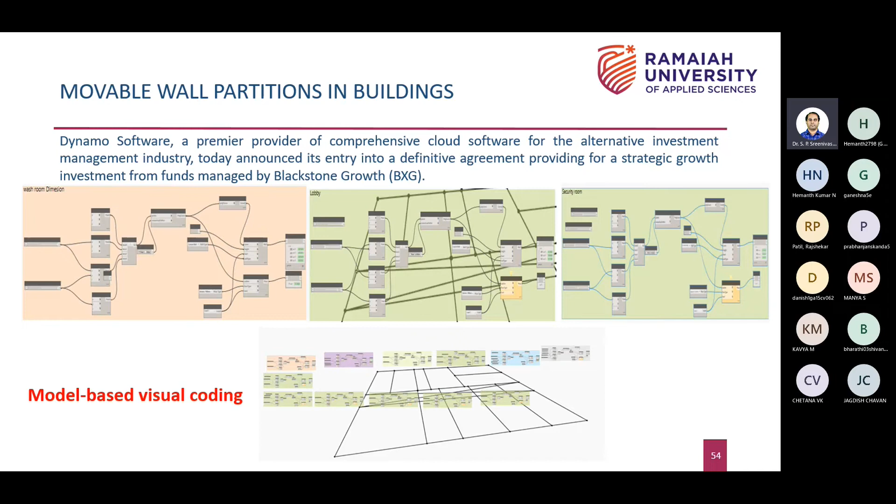So what is the purpose of this software, this model-based visual coding? It helps us to build repetitive models. For example, if I want to build a small wall with some height, width, and thickness, I can do that using coding virtually. No need to do it manually or by yourself, you can automatically do that. And if you want to build the same wall, let's say 100 walls, you can do it easily within seconds. That's the purpose of Dynamo software.

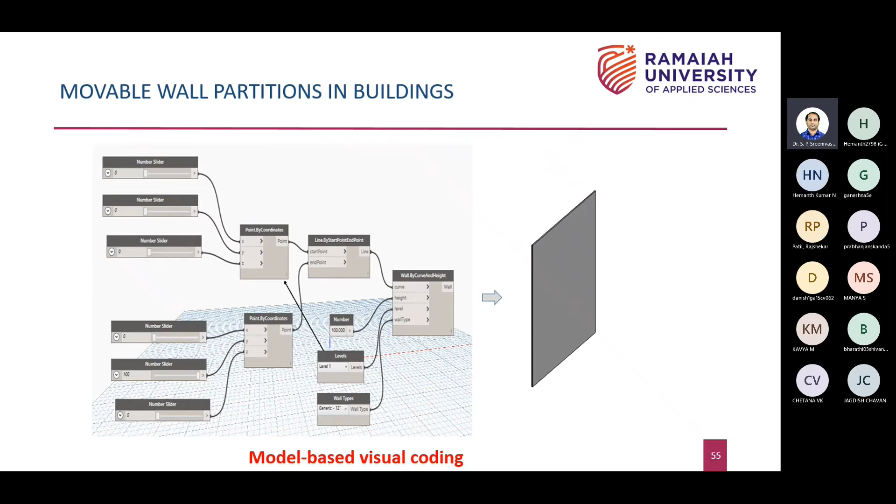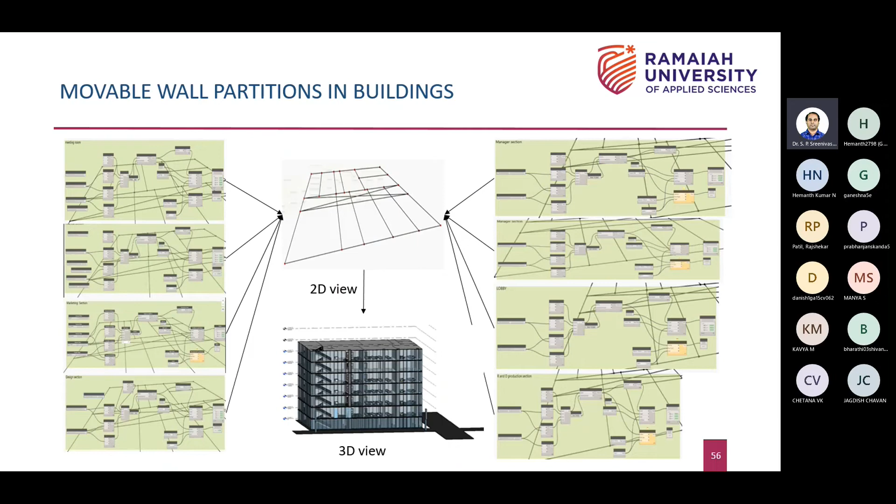It's one of the model-based visual coding softwares. Here you can see that this student in MTech level used a lot of coding for different components, and he built a 3D model from the coding directly. He did not start from scratch, but with reference to the earlier model with the 2D plan, he built a 3D model. So he also used a lot of the same softwares, Dynamo, Revit, all these softwares to execute this project.

And there are a lot of other things that happened. You can see he also used MATLAB here, another coding software, and he used various algorithms like the genetic algorithm. It's too much into math and all, which I'm not discussing now. But what I'm trying to say is, it's not just modeling, what you see in all this animation. Too much analysis happens inside these virtual models basically.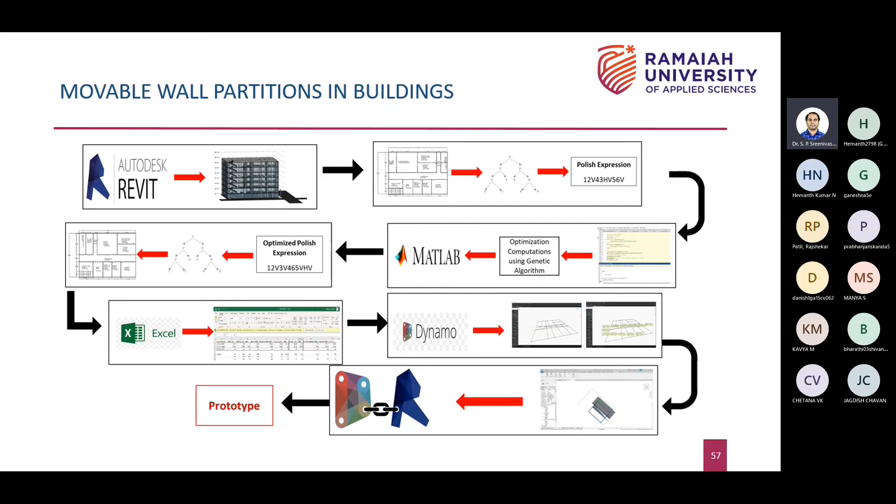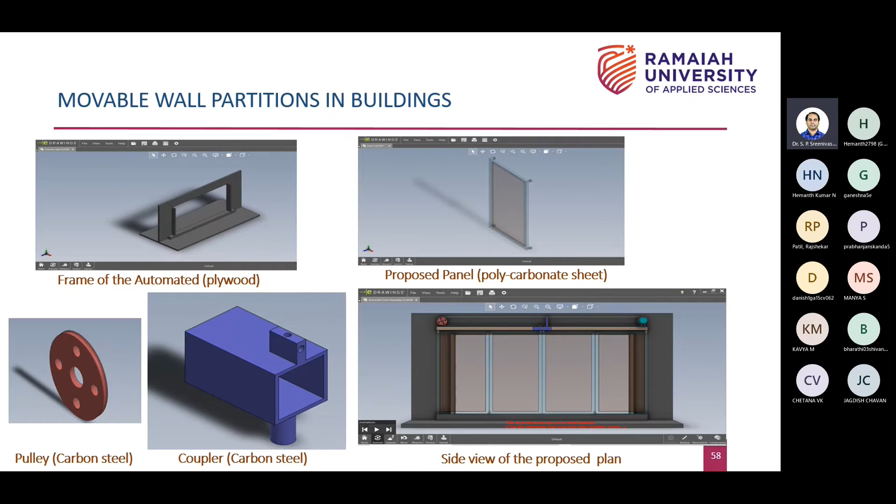This group of MTech people also worked on a prototype. Basically, they want to propose movable wall partitions in the building. So before going with a real prototype, they built everything virtually in their BIM platform so that they can assess whether any mistakes are there or not, before they finally go with fabrication. So what happens is, before you start fabrication of all these components, you can discuss with each other, show it to your superiors and to the fabricator. Because if any mistakes are there, it can be rectified now in these models, rather than after fabrication, when you cannot easily change it.

So another project called Volumetric Model Planning is done by an architect at MTech level. He's trying to optimize the space utilization of the building. Especially for mixed use buildings or commercial buildings, you end up wasting a lot of space. When you say space, it means the entire volume of the building utilization, which you should not waste.

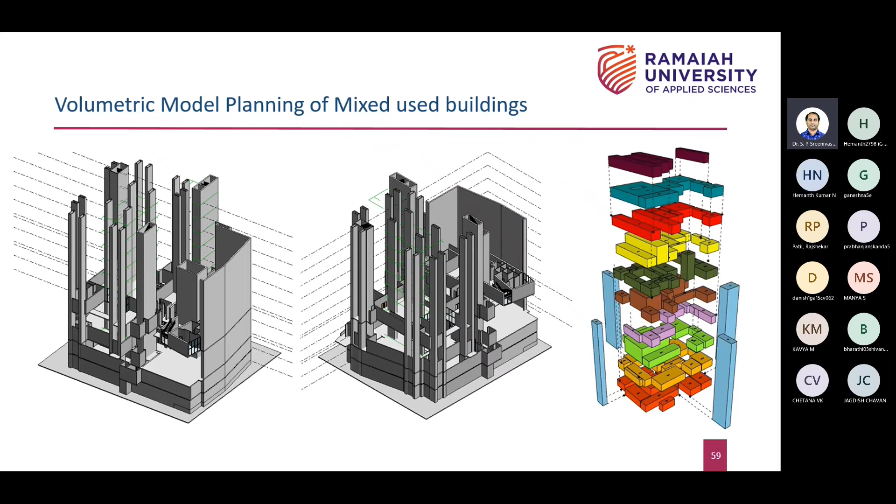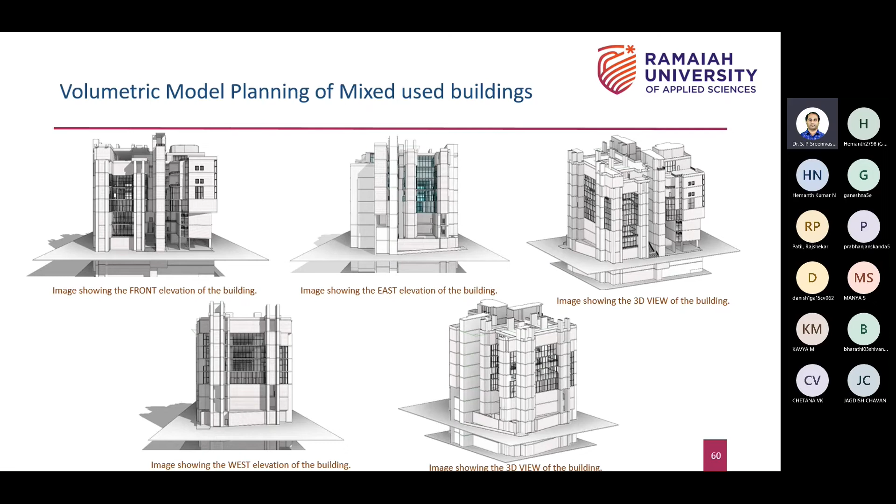He's working on that, and in this model you can see it requires very high detailing. It's not as easy to model as compared to other models I've shown till now. He's taking one case study and building a model, and every border, every line you see, is one volume, one element, which he's trying to optimize by rearranging the blocks using some optimization algorithm. There is a set of algorithms that help us do this job. He also used the same software, and did some energy analysis using another software called IES.

So this is what happens: you have a building like this on the left hand side, and you can extract all the volumes out and rearrange them to maximize space utilization. This is not done manually, it's not possible to do manually, but requires a set of softwares for that. So this is an ongoing project, it's still going on.

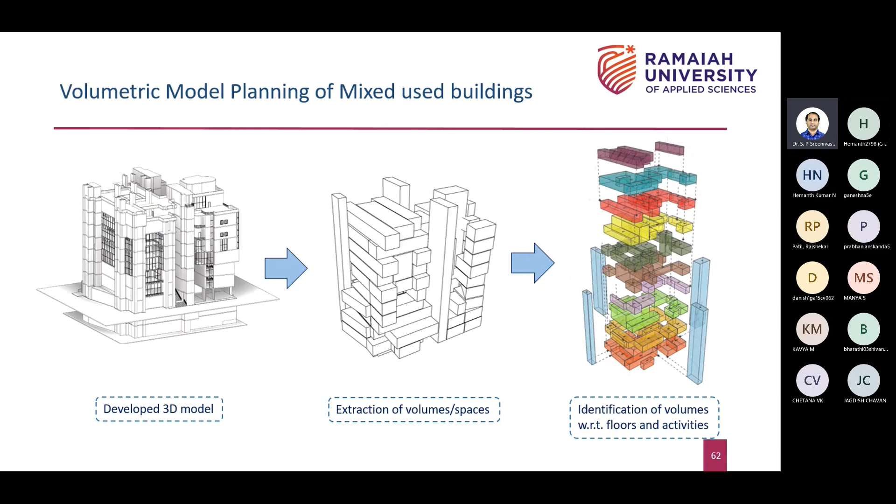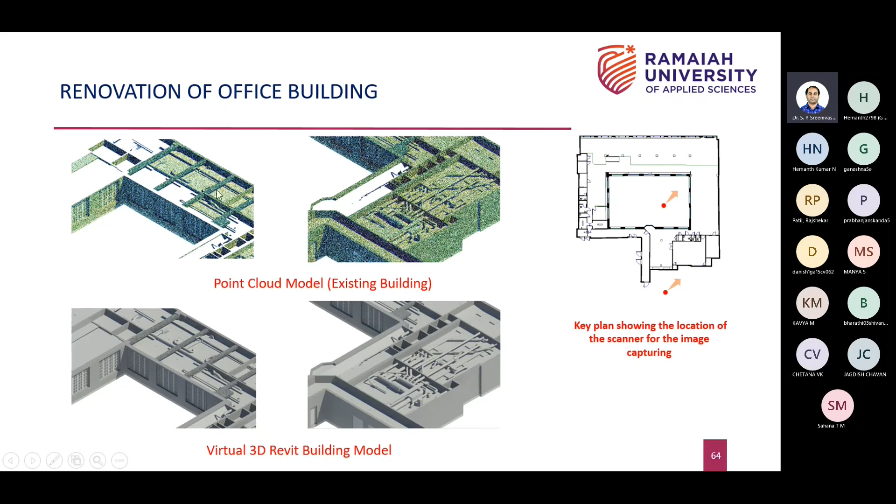The main purpose is to do renovation work on old buildings. If you have old buildings and want to change the design or improve them, you can build a 3D model from the existing building. You can propose new features in the model, and then go back to the site and build it. This is another structure.

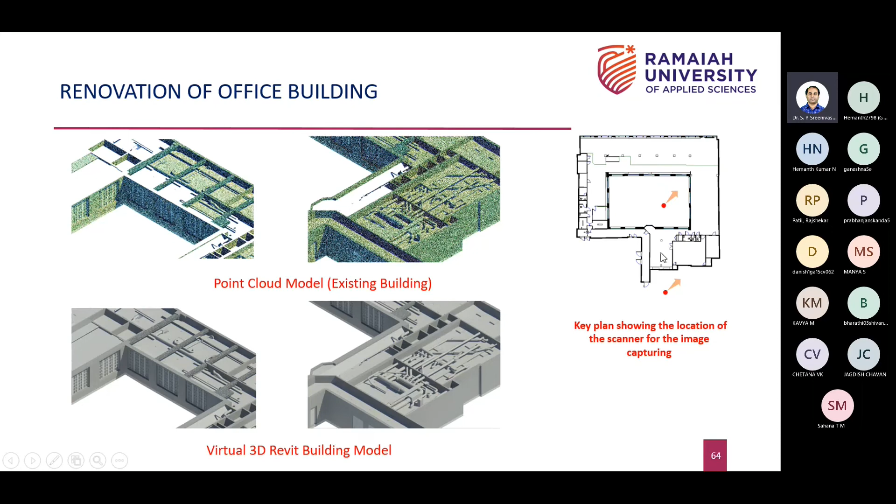On top is an existing model, on the bottom is the virtual model. You can see here he has changed the cameras to capture other areas of the building. On the right, he has changed the cameras again to take the inside of the building, and below you see the virtual model. So what is happening is reverse engineering. You are going back from the existing data and building a virtual model. Whereas previously you build a virtual model and then go with the real project, here it's reverse.

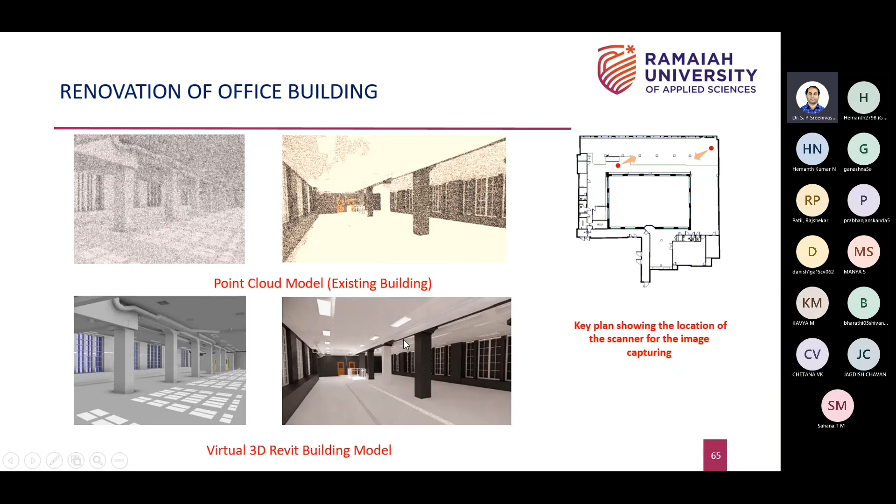You take an existing building and build a virtual model from that. Again, you have to re-change it. The purpose is you can change a column, move it virtually and see how it happens. Then you go back to the site and build a wall there. So you can do all those renovations first, change the building. Another example, same building, same project again.

So that's all about this webinar, it's all about virtual construction, application of digital technologies.

Before I conclude, I want to say one more thing. Nowadays especially class 12 students and many people are showing interest in artificial intelligence and data science. There's a separate course we have, but there is also a lot of requirement for artificial intelligence application in our industries.

There is a lot of scope to apply machine learning, data mining, data visualization, and statistics in our area too. This slide says that BIM, building information modeling, which I've covered till now, becomes a solid foundation for machine learning or artificial intelligence systems. If you learn BIM, you will easily be able to learn AI technologies to apply in your projects. BIM becomes one of the strong foundations for applying machine learning or data science concepts in our construction industry.

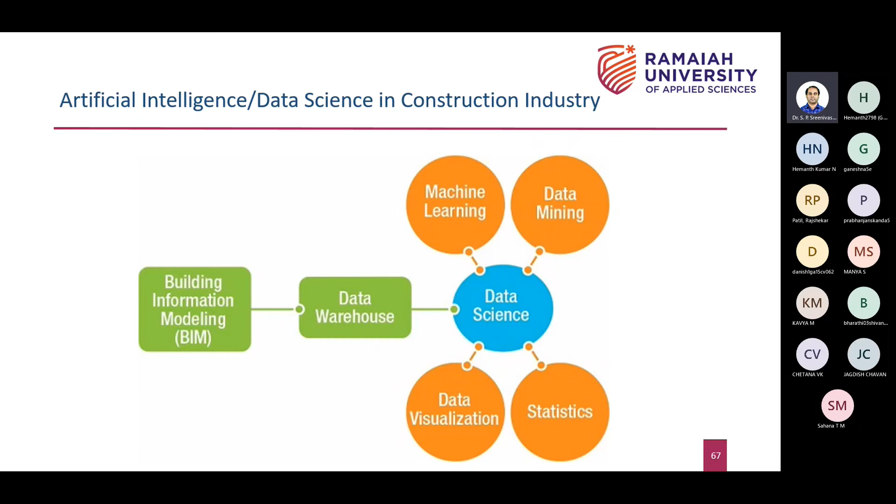So instead of going with a separate course on AI, data science, or computer science, if you take up this civil engineering course over 3-4 years, you will try to utilize these concepts, not in the beginning, but starting from the 6th semester, 7th, 8th. Even in MTech we have a course on AI where we teach how to apply AI concepts and software. There are already a lot of students working on machine learning and artificial intelligence in our university, though I didn't show those projects since they're not part of this presentation, but I wanted to add it because it connects with BIM.

As I told you, we use a lot of software to build up virtual construction. But if you want to link with AI or data science, we will be linking with other sorts of software, all the data science software will link with this. This is still under research, but by the time you graduate in another 3-4 years, you will start applying this. There is a lot of requirement from industry for this.

Even Python is linked with Revit. You can use Python for coding a building, you can code a building basically. Instead of building manually, using code you can build a model. Python is generally part of computer science, but it is linked with our civil engineering domain. It's all about technologies, all about the software you will learn in your BTech and MTech course, not in very deep detail, but you will at least learn the applications so you'll be ready for jobs.

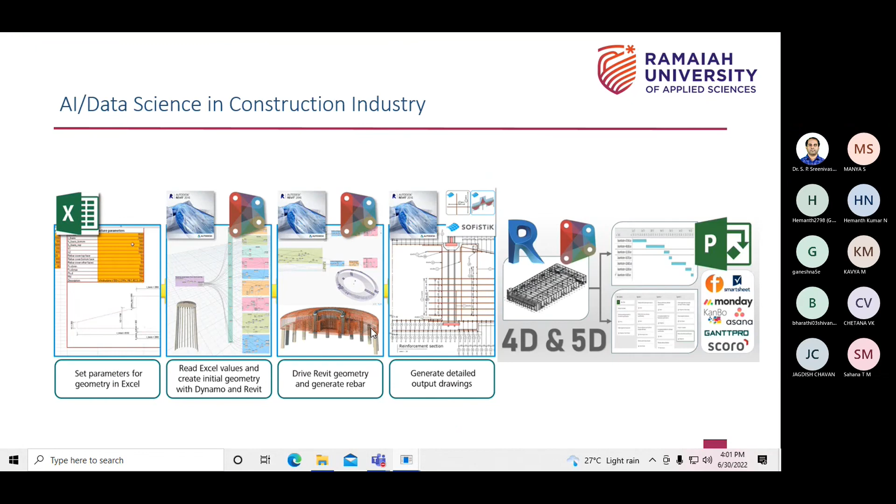So anyone else, if you have any doubts, I can cover that. No doubts, I can end the meeting.

Okay, fine, I think there are no doubts here. But still, if you want some more clarity about the curriculum, you can always contact our department, either me or any other faculty. Just go through the website, you will get a list of faculty names. You can contact me, you can contact HOD, anyone, and we'll clear the doubts you have before you take admission.